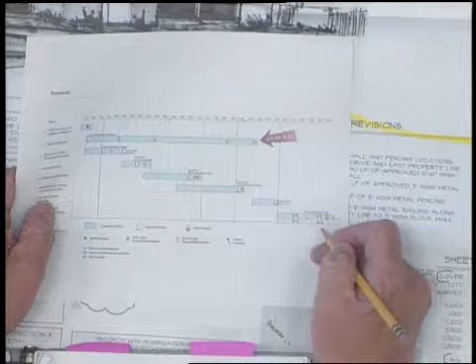What's interesting is that's why I passed out this little schedule given to us at that hearing on Friday, where you can see it says 'you are here.' We're basically near the end of the process. They're going to proceed with drafting an ordinance, and then move on to Planning Commission and City Council for approval. In essence, we've kind of missed the whole window.

Unfortunately, I don't know, maybe some of you got notices, but I never received any notices about meetings or the progress, other than the one I attended back in August. I had hoped we would get a response and our subcommittee could meet again, but unfortunately that didn't occur.

I was told at the meeting on Friday that we may get a courtesy visit by staff before it moves on to Planning Commission, but that essentially may be the end of our ability to have input. So that's kind of where we stand.

Several things happened on Friday that I think are of interest to the work we do on this board. One is that the Planning Commission made a recommendation, or agreed with staff's recommendation, to allow an increase in size for accessory buildings on large parcels of 3 acres or more, to 1,750 square feet. There's also a move to combine what was the size of a garage at 750 square feet on the same parcel with an accessory building at 500 square feet, so now you can have an accessory building at 1,250.

So we're going to be seeing some different nuances if and when this is adopted by council.

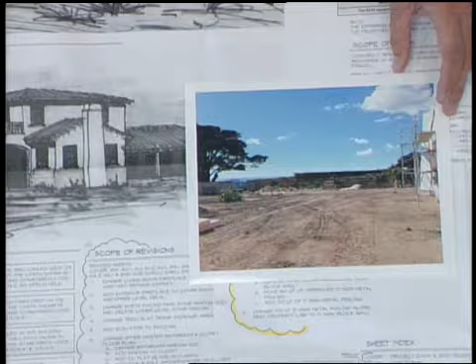Got it. Okay. We have met with the city staff, we've talked to them, we've met with the neighbors. They're all on board, and I'm not aware of any neighbors being here because we've done our homework.

On our other — I made a mistake, this is on the west property line. On the west property line... this is the east property line. On the east property line, we currently have a masonry fence up to a certain point, and then an open metal fence coming across. This fence is 5 feet high. This masonry fence varies between 5 to 5.5, up to 6 at this one point. It's all documented. What we are going to be doing is changing this fence and making it 5 feet all the way across to this point, connecting to the existing 5-foot-high metal fence. So that's what we're doing.

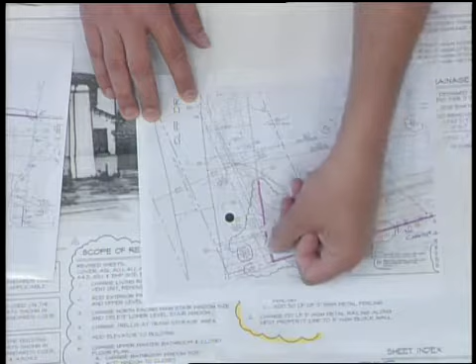Here is a view from the actual street. Let me go back one notch. In this case, there's currently a city easement. The city always wanted to have a gate at both ends. When I had the fence going in at a diagonal, the gate wasn't practical, so I was able to talk them out of it. Now that we're going to go perpendicular to the road, they would like to have a gate here. We will still have a man gate here to the bridge going across this point.

So here is the view of the house that's under construction and where the fence is going to go, the 5-foot-high fence. This is approaching it, so you can see all the miscellaneous utility stuff that's happening in the vegetation.

Now, this is from our neighbor's house, John and Sandy. We met with them to show them so they would understand the impact of what we are doing. We put up the story pole string lines, and they are on board with our proposal. So that is our request today.

Okay, anything else? Nope. Okay.

Before we go to questions and comments from the board, is there anyone in the audience wishing to address this project? Katie, did we get any written material? No, Mr. Chair. Thank you. Chair, seeing no one come forward, I'll close public comment and bring it back to the board for questions.

Who has questions? Yeah, Mr. Chair, I do. Paul, what was the reasoning that it was designed this way in the first place, and what's the motivation to change it? The motivation was that the neighbor wants to be able to use this part of his land for his needs. Okay.

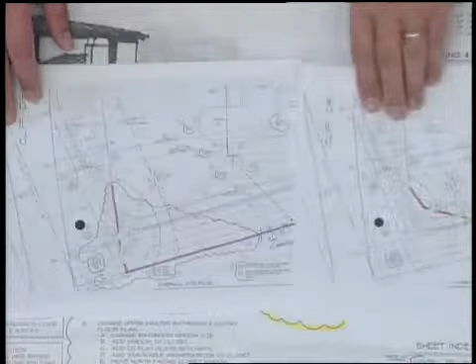And can we show this in relationship to the full site plan? Yeah, so let's put those back. So that one is down here. Correct. And streets down there? This is Cliff Drive, and this is Marina Drive with the cul-de-sac. There's an existing house here, and then this is the other section. Okay, so this is occurring where the cypress tree is. Yeah. Okay, and then the other one is occurring over here. Okay, all right, other questions?

Was there some kind of a neighborhood easement, or how does that tie in? Correct, and staff can help us on that discussion. It had to do with a visual view corridor along this side and along this side.

Landscaping is stepped accordingly along this side, which is why I took the picture from the actual street so you can see how the current situation looks. Then taking this fence that's along this direction, taking it from 5 foot open.

So we're talking about that fence right here, that fence that's currently there. Is that on your client's property? It's currently on our neighbor's property, and what we will be doing is putting a fence that's 50-50.

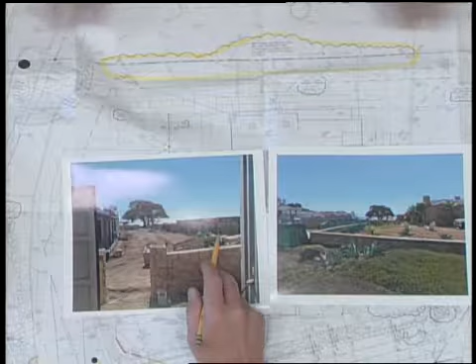So it's basically on the same line? Whose property does it sit on? Currently, that fence sits on this neighbor because he built his house first. If you rebuild it, will it be in the same location? It's going to be on the property line, split 50-50, dead right on the property line. Correct. So my client will lose about 4 inches of land.

Down here, this one's going to be masonry with plaster, and I'm assuming capped and finished similar to the other fences already being constructed on the site. Correct. And this fence down here that's getting redone, is that masonry, or what's going on? No, this is going to be open metal, continuing with the open metal that's here. We have a 5-foot-high metal fence.

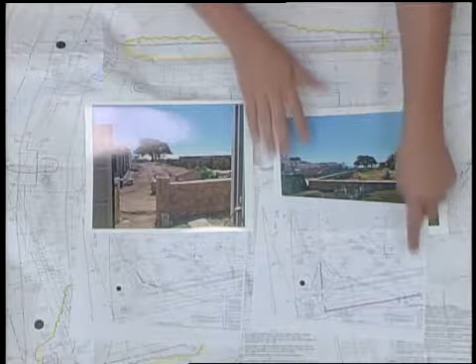Is that showing on these drawings? There was a detail, but I did not print it out. Kind of a chain link fence, isn't it? What does note number 9 state? Number 9 is 5-foot-high max wrought iron fence.

So is that just a fence that looks like a picket fence? Correct. It has to be non-climbable for the pool. So it's like that, and it's black, and that's what we approved as part of the main project, for this section over here. These people over here had a chain link fence, and chain link is a tighter weave.

So all you're requesting is to straighten this metal picketed fence and go this way, and the gate's a metal picket to match, I assume? Correct. And then there's a person gate here, correct, and then it goes up and hits the masonry wall with plaster on both sides.

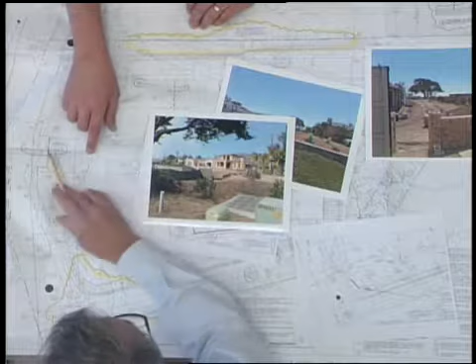When I was out there Friday, a lot of this is being built right now, and what I was confused about is where am I looking at, where is the ditch? Is that this thing? Yes. So this is that concrete swale that goes out, correct? Correct, it stops at this point. It's basically this area.

So the fence is crossing over it at some point, but on the inside at this point. Yes. The bridge you're talking about is right here over that swale? Yeah, it's just so that if they ever walk to Henry's Beach they can come back this direction, and they have another bridge down here just so they can get to the other side. And this wall is already built here. Yes, that one's already built.

Okay, if no other questions, let's go to comments. This is a review after final, so we just have to decide whether or not we accept what is being proposed. Mr. Chair? Yes. Could we ask the planner if there's any comments from the city or any feedback?

Thank you. I'm here just to remind you about the 30-foot view corridor and that there is a condition of approval about it, stating the maximum height of landscaping, et cetera. Staff feels that a wall fits within that, since it's not going perpendicular to the view corridor, it's running down it. So we find it would be acceptable if it's acceptable to the board.

Trees are in a view corridor, right? Could be, not the big ones. The purpose was to maintain the view, to maintain these cypress, as we went through that original review. So this will be a locked gate, I take it, because there's a lot of activity in front of that, right?

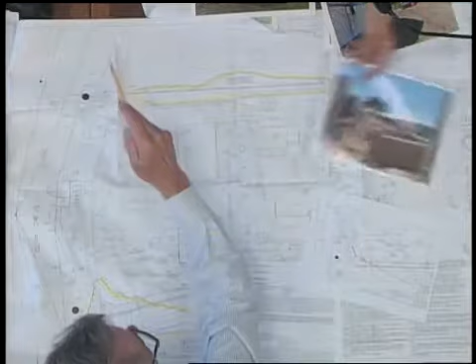If you've been out there, you'll notice that this wall—this is the west side—that wall that goes down in front of that house, they've now planted a hedge right behind that wall. That hedge is now up at 7 feet or something, but it's above the 5-foot mark of this wall.

The interesting thing about this hedge is it starts from this point and continues west. That hedge is not in this area because this was regulated—that's the view corridor. Exactly right.

Hearing no other comments, the chair would entertain a motion. If he's coming back, we can't... No, it's a review after final, so we just have to decide whether or not we accept what he's proposing as a change. We can approve it or not approve it.

I'll make a motion. I move to give this project final approval. I think he's followed the Good Neighbor guidelines, the quality of material is appropriate, and the architecture is consistent in appearance with the style of the architecture in the neighborhood.

Would the maker of the motion want to recognize that we're aware of the view corridor and that the westerly wall doesn't violate that? Yes, and the board is aware of the view corridor that is already stipulated on the plans, and that the current change of design does not interfere with that view corridor.

That's the motion on the floor. Is there a second to that motion? Second. Any further discussion? Hearing none, the chair will call for a vote. All in favor signify by saying aye. Aye. Opposed? So carried.

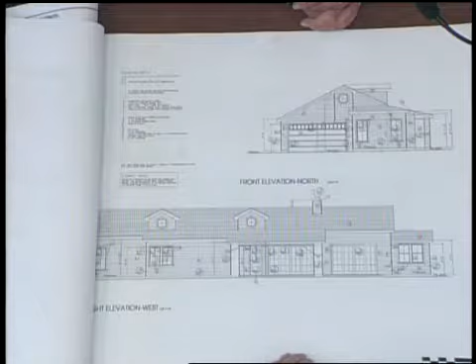And the elevations. So we're on the next page, right here and here. Didn't change the elevations, it just opened. No, it didn't change the elevations at all. Just made it functional.

So we're going to go through very quickly and see if we're satisfied that this looks like a final set of drawings. Okay, so we've got site plans, building code, electrical sections, elevations, structural details, lighting, planting plan for the area they have to plant, landscape detail, et cetera, okay?

Is there anyone in the audience wishing to address this project? Katie, did we get any written comment? No, Mr. Chair. Seeing no one come forward, the chair will close public comment and bring it back to the board for questions and comments.

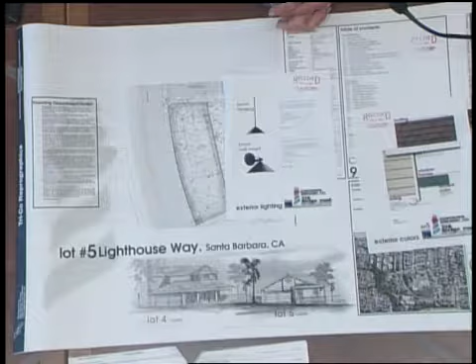All right, if there are no further comments, then the chair would entertain a motion. This is for final approval, and this will have a 10-day appeal period if we do in fact give it final approval. So, do we have a motion?

I'll make a motion. Joe, I move that we approve the project, give it a final, based on its review of what we've asked you to do, and it's consistent with the appearance and compatibility with the neighborhood, and quality of materials, and you have a full set of plans.

Thank you. Do I have a second to that motion? I'll second. Okay, we have a first and second. Any further comments? Any discussion? Hearing none, the chair will call for a vote. All in favor signify by saying aye. Aye. Opposed? Abstentions? So carried. This has a 10-day appeal period for that approval. Very good.

Thanks. Yeah, thank you.

Let's go to... we need to wait a few minutes. So our next item is going to be item number 3, 45 Las Alturas. We need to recess for about 5 minutes.

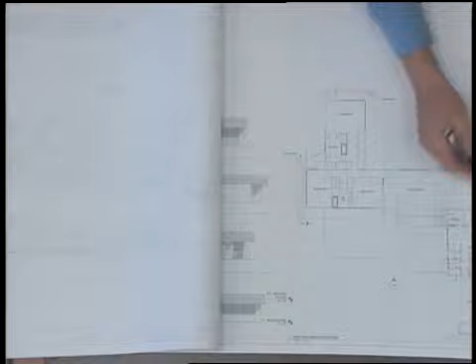This double hatch is the second floor addition. We got 2 roof decks. This is our removal of that eave, and so that happens there, and there. So you can see it here, it's in 4 locations.

So we added glass to the upper eaves there. You can see that existing house has some of that. That's the existing bedroom on the north side. The addition, we've incorporated some of that element on both sides of the addition. This is, I can show you in plan where we are right here.

This is the view off this new little deck. The 2 decks are roughly 100 square feet in size. These are just sitting decks, not huge decks to be inhabited, but they're both small decks. And that's this one there. So the glass runs up in that gable up there.

This is the garage. No, I was looking at the glass. Got it. Where that decks, those 2 decks are right there, back. Yeah, they're apart, they're apart.

We also looked at the stair. In the previous rendition, the stair was in line with our second story addition. We broke that out, and that gave some relief to the street side facade. So this is the street facade, the stair is articulated on the facade, and it gives the roof a nice break there.

We also reduced the size of this chimney. In addition, we've added a gate and a man gate, and this is the existing 5-foot stucco wall. It's a 5-foot wood gate and another piece of stucco wall, and that sort of ties everything together.

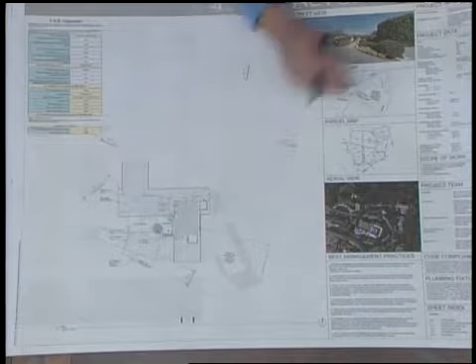And we've got, and Chris can talk about this, but we've got a series of screenings going on. There are 2 existing trees in this front courtyard, and then Chris is going to talk about the additional screening we're doing at the front. So there's a filter to that. I'm going to show you an elevation.

Let's see, so Joe, that's that window there. This window's in the shower, it's going to be a frosted window, it's not a privacy concern.

The other, just to show you the deck, there are 2 little master decks. And the one that is nearest to 44 Las Alturas, the section, and the owners put up story poles so we could see this too, and we have the photos, but the section shows that the house itself, the garage, is screening that deck. So the whole addition is wedding caked in the middle. The outdoor spaces on the second floor are tucked in with that second-story addition.

Our plate, the kitchen has a 9-foot ceiling, and the master has an 8-foot plate. We stayed with the 8-foot plate at the second floor. We pulled back before we had shorter eaves, so we pulled those out. These are bifold windows, so if you're out on this deck, that's a 6'8" rafter tail right there. Dropping it down would have been a conflict with the window.

The other thing we looked at is the amount of glazing. We did a reduction there and a simplification just to get everything working together. We had windows on the master running to the corner; we reduced that size and brought the windows up to the eave level. Same with down here. And then, like I said, we brought these windows all the way up to the top of the gable.

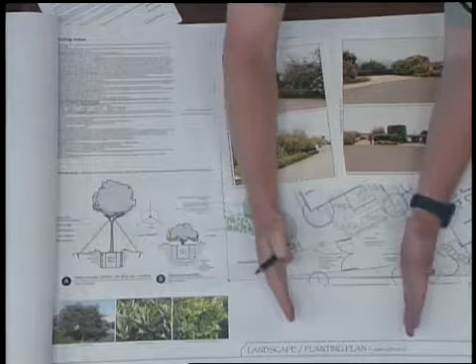Yes, okay. So the project we're talking about is to this side, correct? Yeah, that's right. So those ficus run down this line and stop somewhere in this area. From here to there, these are probably 14 feet tall, I think. We also have some existing hedge screening here that we're going to keep to remain, and that's very minimal on the landscape, aside from existing.

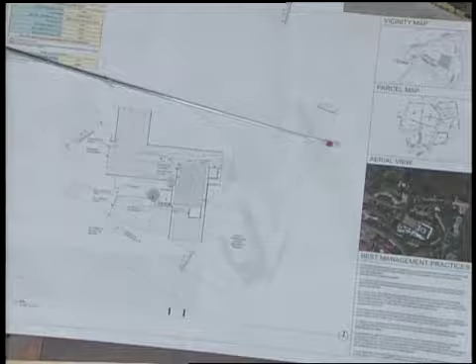This whole thing could have been solved if we had had an opportunity to consult and suggest that they take this pop-up and, instead of having it face the street with its broad facing which upset everybody aesthetically, turn it around 90 degrees and put it over here. They'd still have mountain views, they'd still have water views, they'd still be right over their pool, it would be very attractive, and it would solve my privacy issues. But we never got a chance to discuss these alternatives with them. That's the only thing - why not have a friendly neighborhood conversation?

I know Rick - is it Chris? Sorry, Chris had mentioned some time ago that they had thought about other versions but didn't like them, and there was this problem or that problem. But this solves it, from my point of view, and I just think we should have had a chance to talk about it. Because the way it is now, it doesn't solve it for us.

Next speaker is Thomas Monroe.

I live at 20 Las Alturas Circle, and I can certainly understand these people's desire to have a dream home in Santa Barbara. I just moved there in January into what was a new home, bought as a spec home, so we weren't involved in the design. Its second story was disallowed from facing the street - it goes down the hill like most other houses on that street, so from the street it appears to be a single-story home. My observation is there's plenty of slope there to build down. I don't know if that was considered, but nobody was talked to in advance. We got your note stuck in our door, but it's way after the fact and your plans are already submitted, so I think that was a little...

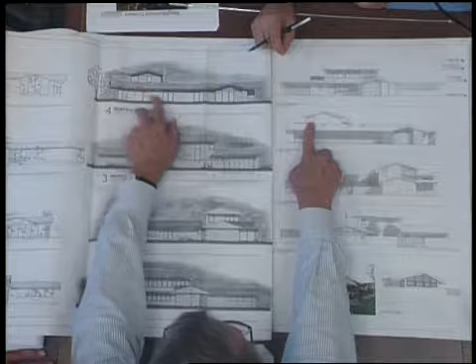And this is west, the piece that he was showing. It was a hip, and now - no, it was a gable. Soffit extrusion, yeah, that soffit thing, yeah, that's what he was showing at the beginning. It was kind of a Frankenstein.

Here it is, I'm sorry, right here. Oh, so okay, as he mentioned, he said to go to a Cliff May design, he went to this. Okay, so that was Cliff May. And then...

Okay, now what's going on here? It's a wall and gate now. Yeah, so in this version, we didn't show it. In this version, we're showing the existing stucco wall, and then this is the new gate. So the new gate - is this piece of wall there now too? No, this piece of wall is not there. All right, so everything from here over is new.

That's right, the property line is angled. And what's the garage door material going to be made of? Right now these are glass garage doors, but they're hidden with the new wall. That's correct. But so a piece of the glass appears in front of the new wall. That's right. And we'll go back to that in a second.

So that new wall, let's just go back very quickly to the site plan. The old one? No, this is the old one. Whoops, we can still use that to look at. Let's get rid of it real quick. So that wall and gate is out here. That's right, that's what we're looking at. That's this one.

All right, and then what did we look at? South, south is - where are we at? South is here, so this is that wall coming across. So those windows are there, that's now a set of doors. Yeah, that's existing, that's the wall entry. Okay, there's the fireplace - show that. That's right, that's the fireplace there.

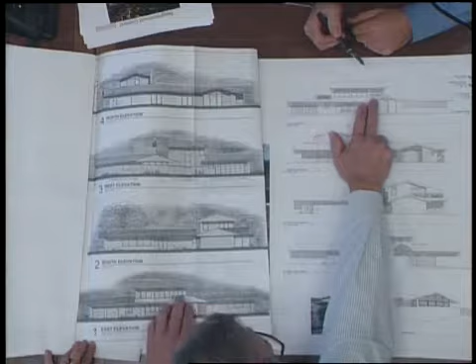Well, the eaves are lowered, so they're basically at about 6'8", which is typically what you do on a second floor. Did the height of the addition come down? The height, as far as, we had added a little bit just for framing on this version, and we dialed it in here, so the height did come down.

How far? 19 inches. So the whole height of the roof has come down 19 inches. If you left the walls, the plate heights are at 8 feet up there, so it wouldn't change the height of the roof, would it? That's right. We just had too much framing on the roof before, so that's what brought it down.

19 inches of framing? Yeah, that's a foot and a half. It was conceptual. I mean, we got to dial it in. Okay, here we are. And then this piece there.

So, to the front floor, yeah, that helps a lot. So the whole addition has come down 19 inches.

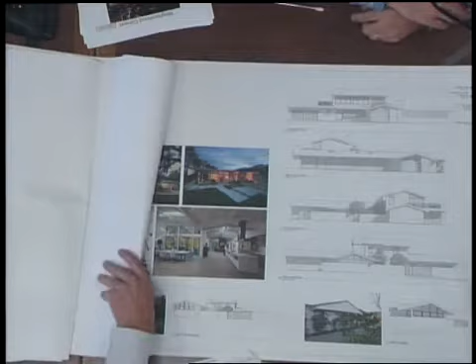But did you also change the slope of the roof? I think it just got clarified what it is. The existing roof is 3.5 and 12.

Can you tell me how tall the house is now? If I'm using this as the finished floor line, which looks like at the bottom of that, it appears to be about 22 feet to the ridge.

Under the city's single-story residence definition, remember we don't look at single-story homes typically unless they're in a special district. Those are defined as anything under 17 feet 6 inches. So that line represents a single-story house allowed in fact in all places within the city, whether they're in special districts or not. So this is more or less 4.5 feet higher than that.

Single-story criteria. Why was the ficus tree, what was that reason for the hedge, the 14-foot hedge? It exists, but why does it exist? Can you answer that? Can we go back to the photograph?

So, this is a hedge, and I assume that's a tree. Is that right? If I recall, that's a ficus tree. This is a hedge, and under the new hedge ordinance, this is just one tree. Yeah, it's a tree. You can see actually in this picture there's a series of them. They run down the property line, and they're 14 feet tall.

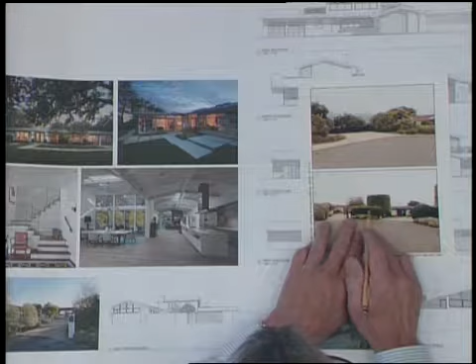Here's a good picture of that - I'm estimating based on the photos, but it seemed about right. So there it is, that's basically the same thing. This hedge here is 8 feet high, maybe less than 8 feet. But under the new hedge ordinance, you're allowed to have an 8-foot hedge on the front property line.

I'm not questioning the height of it, I'm questioning the reason for it. Oh, well, those are on the neighboring properties. Can I ask the neighbor for that? They're not on review. Not appropriate for review. Ask the neighbor why the hedge is so high. There are other hedges over on this side on other properties that are just as high.

I think if we're questioning privacy and we have a 14-foot hedge, I have a right, Brian, I have a right to ask why. So let's go back to the plan for a second. I'm just questioning why, if we're questioning privacy here, and all of a sudden we're on the neighbor's property.

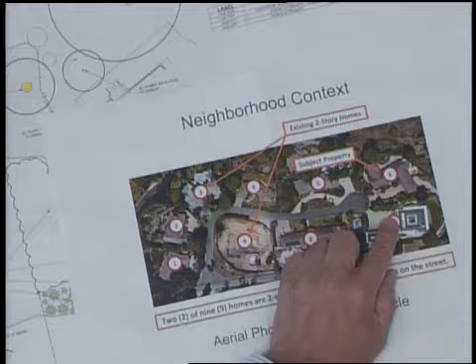And there appears to be a hedge here also, correct? Yes. And that's on the other property? I believe it's on both - it straddles the property line. Okay, so it's on the neighbor's property too. I think it's Ligustrum.

Other questions? Yes, I'd just like to get the aerial - go back to that area. Sorry, not the aerial, the street view. This one that shows the house and the story. Just talk into your microphone, you don't have to talk into the box, but make sure it's on.

Anyway, I just wanted to - would you show exactly where all the new olive trees are going to be screening, for the purpose of the public?

Looks to me like it's right in front of that bedroom. It appears just to be lined up with this eave, so what would the exact placement be and what exactly are you intending?

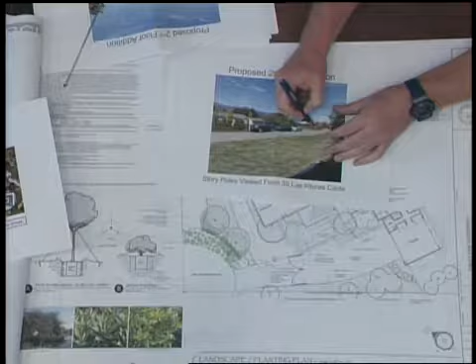Something to that effect - there's 2. The second one being over this direction, about like that. It would screen some of that new window you put in, that gable - actually looking at this, that gable right there you could consider filling in with glass. How about a third one?

Are there olive trees around, or are those just 2 new olive trees? 2 new olive trees, there's no other olive trees that I remember. And the olive trees, these particular species grow how high, more or less? 25 feet.

Other questions? I just have a couple on your elevation, on the chimney. Where am I? Right here. Are you going to have any kind of chimney cap, or is this going to be a gas fire?

Yeah, and we are going with a standing seam roof here, so I was going to mimic that with maybe a 4-inch flush chimney cap of the same color. Okay, so that's what these two lines represent? Correct.

And then over on this side, these rafter tails are going to be exposed. So, and I know you're still at design development...

So are you going to have any gutters here, or is the water just going to come off that? Yes, we are having gutters. I think we did not show the downspouts, so somewhere there'll be downspouts, etc. That's correct.

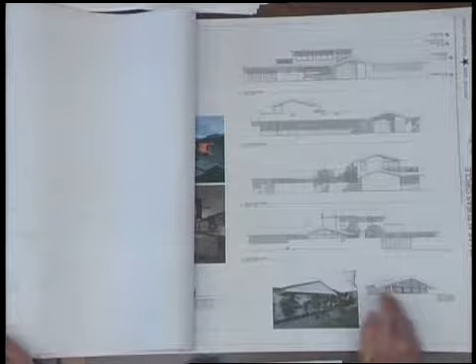Any other questions? Yes, for the architect - I heard you answer the question about turning the house in a different direction, but what about, did you explore the idea of putting the house lower? And what was the reason that you aren't doing that?

Yeah, there are a couple reasons, thanks for asking. The leading reason is this is the existing building footprint, so we are not increasing any impermeable area with this remodel addition. Another reason is that this is actually built up right here.

So this is really poor soil on this side, and there's a lack of flat areas. We looked at maybe coming out here, but there's a big mature avocado here, and also it would be a hall along an existing bedroom to get to a second bedroom. It just doesn't work functionally without really ripping that area up. And obviously the views from up here are different than over here, so there's a way to explore that with this addition.

We did spend about half of one of our previous meetings discussing all the different locations. Well, I still want to bring it up so we can have it out there anyway. We did go over that in depth, I think, at the last meeting. I just want to go over the issues of window placements, so I'm going to mark on your drawing here.

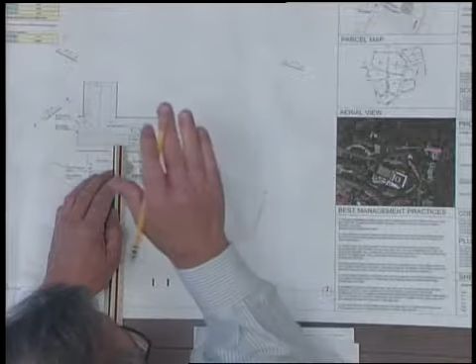This is the windows here. There is a window here, and there is a window right there, right? And the staircase is in here. That's right. Okay, and I just illustrated a moment ago on your section that somebody standing here can look out that window, but there's no way to look out this window because the staircase is too low at that point. You'd have to get on a ladder to look out that window, correct? And that window, I'm assuming this is relatively accurate.

This is the face of the other house, or is that the face? This is the roof line, and that's the face. Okay, so the face of the other house, and we don't know exactly where those windows are, but if there's any windows on that surface, from that window that you can't see out of, that's almost, if this scales correctly, 70 feet to here, and there's a hedge in here somewhere. And the trees, kind of those big 14-foot trees, kind of stop right here, and then there's hedges. There's a couple other trees, at least from the aerial photograph in here. And then from these windows here, if I look directly straight out, it's looking past the corner of the house.

If I'm looking from that far corner window to this house, from this point it's 80 feet. This is scaled correctly, at 1/16 scale. So that's 80 feet from here to there. That's 75 feet from here to there. And let's see, there's a window that looks that way, but you can't really look out of it because the staircase is, oh no, excuse me, that's where you do look out.

Can't see that. Okay, and the two trees that we're talking about being planted are roughly right there based on your plan. Okay. And then, was there another window over here? There's a shower window, but it's frosted. Here. Yeah. Okay, so there's a shower window here. Okay. All the other windows are facing towards Montecito and Carpinteria, correct? That's correct. Okay, other questions?

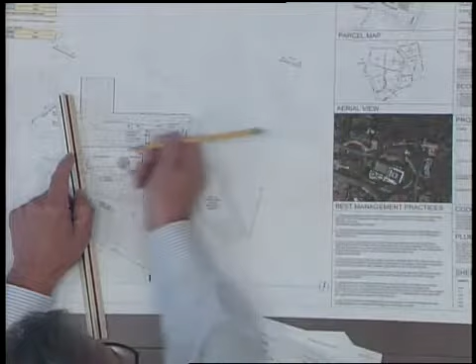Okay, if there are no further questions, then let's go to comments. The applicant is requesting project design approval.

I have some comments, Mr. Chair. I kind of understand where Mr. Matisha was going with the reason the hedges are so tall. But I think I'm the one that brought up the Cliff May style. And I grew up looking at sunset books of Cliff May. Cliff May had a philosophy: his philosophy is we were coming from an era of very formal architecture, and his purpose was to bring architecture to the people and to be a very calming, casual lifestyle. It was very popular in the 50s.

A lot of his homes were about introducing outdoor living into the inside. You know, a lot of homes had barbecues that were on the outside, brought to the inside. It was about very casual California living, kind of personifying the California lifestyle. And I felt that the original drawings you had brought us didn't quite capture it. I look at this, and I look at what was there, and I actually think you did capture it. I think you were very successful in creating the philosophy that Cliff May was trying to espouse, of bringing the outside in, very casual, relaxed kind of lifestyle.

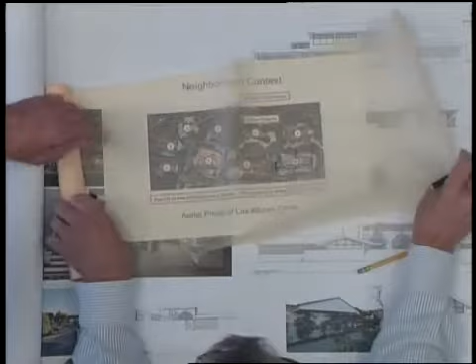And so when I look at the neighborhood and how it stands now, I think what they've done, what they've designed, and in keeping with the style of the architecture, I also believe you've achieved a look of not having it be a remodel. It actually looks like a whole structure.

And the other thing I want to underline and really acknowledge is your balconies, your upstairs balconies. They don't look like party balconies. They actually complement the space that they're attached to, the bedroom. So it's actually improving the interior space of the bedroom, and they're not meant to be some kind of party balcony, for kids or whatever.

So I think I can totally support this project. I think it's well within the guidelines of this neighborhood. Okay, other comments? Yes, please.

Yes, I agree with my compatriot here to my right. I think that this is really not a huge addition. It's very modest, and I think you did a very good job of it this time around.

I think that the addition of a third olive tree might really be a good idea in the area that you saw. Sure. So right now where they're positioned, they're going to hide half of that addition from the cul-de-sac. The third one will probably take care of the whole thing, so that you won't really see it from the cul-de-sac.

I think our fearless leader, Fred, has pointed out that any windows that are looking into any neighbor are a good 70 feet away. I mean, also screened by ficus trees and everything. So they're well within our guidelines as far as privacy goes.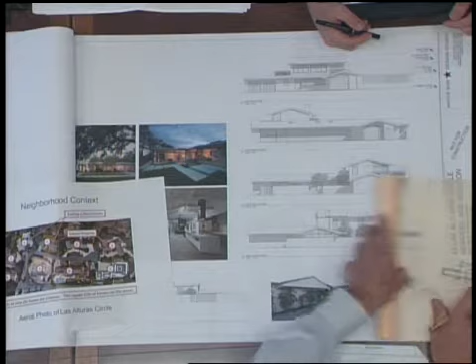And if you try to translate what's shown on the landscape plan, I believe you're going to see a tree right here, right on the line, right here and there, and probably another one up there. If we put three in there, I think what you see here—and Denise is suggesting another—put one more tree there. Yeah.

That's a scale, that's 16 feet. I just drew... here is 25. Here is a human person for scale. Okay.

And if these do indeed grow to be 25 feet, you said? You see how big those get? More, eventually, yeah, those are gonna be 25 feet. I think it matches.

I mean, there's some, and over here you have a hedge. There you have a ficus, that's 14. Whoops, I didn't draw it at right scale. Hold on, 14 feet. There's 14 feet here. Okay, so there's 14 feet here.

I like the direction it's going. I think the idea of adding another olive tree would soften the look of that second story, the addition, that most everybody doesn't like. And I don't think that there is any privacy problems here.

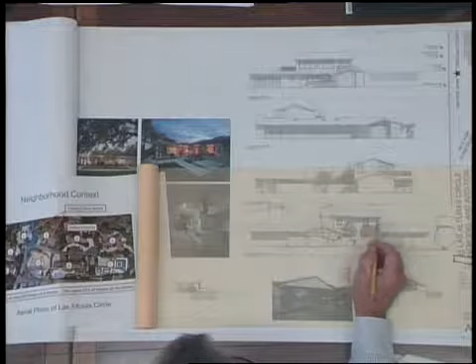When you do come back for your next review, I'm going to be very interested in the material of this window. I think that the plan clearly indicates that the privacy views have been addressed. The City Council has instructed us that we are not required to guarantee a view out of anyone's window, either from the applicant or from adjoining properties.

We do, under our guidelines, try to really look at the issues of privacy, particularly as Ms. Woolery pointed out, when we have properties with a property line and we've got 10 or 6 feet between setbacks, and we've got a home like this, with a second floor up here, and windows. We run into that quite often. That's of considerable concern, but when we have windows that are 70 and 80 feet apart, in my view, that's of way less concern.

And particularly how these houses are oriented to each other. They're not like we find in many houses in other parts of town, where the houses kind of line up in a row. So I think that's pretty clear.

The only thing that concerns me is the fence and the gate issue. Just because of the nature of that street, most of the homes don't have fences and gates out front. So that's kind of a character issue in my view of the street. I would like to see a study without the gate and the wall there, maybe some landscaping. But certainly if that goes away, then I'd really be concerned about having glass garage doors, because at night those are just lanterns straight down the street.

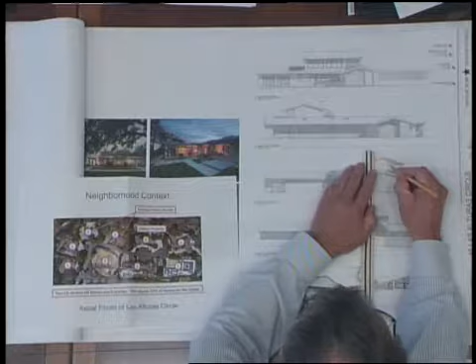So if you scale a 6-foot person, that's a 6-foot person, if I'm doing this correctly, inside here. So see how that deck is tucked into the roof. So the roof is hiding a portion of that deck, and then this deck is way down.

That's another relationship. I know that it's far away from the neighbor, but they're here. Okay, the neighbor is over here. They're 70 and 80 feet away from them. I'd just like it to be clear so they understand it too. There's 60, 70, where am I at?

Section showing, if you want to see it. 80 feet. There's the neighbor over here. I don't know where the elevations are here. About the same. Charles, do you want to see a section of this right here? They do have a section.

That's this. Okay, it's down. The roof is actually providing a lot of privacy for that. So line of sight is here, at that corner. So if they're looking over that corner, looking over the roof, they can't see that house. There's no way to see that. This edge of the roof blocks it.

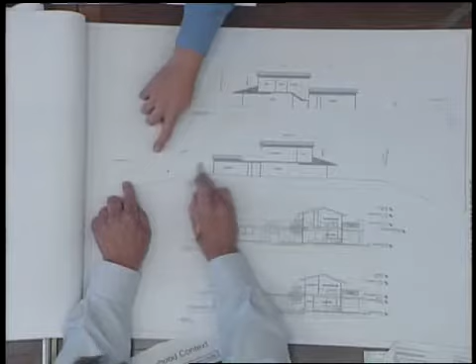And what about them looking up? What are they going to see? They see above that line, so all they're going to see is that roof. See, there's the line. Is this a rail material? Or is that a roof? Oh, that's the roof over the garage. That's the roof. See, the roof is doing this, okay?

And the deck is carved into there, okay? So somebody standing here can't see down over this edge of this deck, over this edge of this roof, down into this house, which is actually down.

It's almost, well, it's actually more than 6 feet. It's more than 6 feet, is it not? If I scale this right, 3/4 inch, it's like 8 feet. Okay, yeah, I kind of understand it all. Thank you, okay.

Any other comments? Hearing no further comments, the chair would request a motion. The applicant is requesting project design approval. We could give it project design approval with comments, or we could not give it project design approval and give direction for the applicant to return with comments. Those are probably the two general approaches. So the chair would look for a motion.

I move to give this project design approval with the following conditions, to return to the full board with the following conditions to be met: please look at an alternative to the gate at the driveway and the wall and the glass garage door, and to put another olive tree in the front at an area to be determined by the landscape architect.

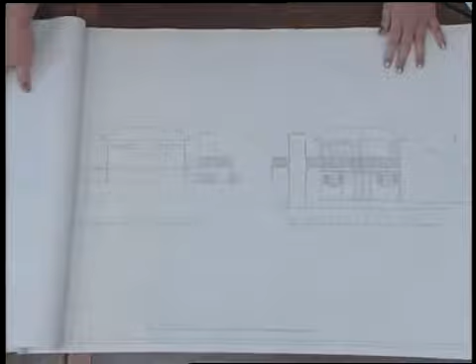Okay, so here we're looking at the west elevation and east elevation. I don't believe solar access is a problem on either side of the property.

Here is the existing site plan showing the layout of the home, and here's our proposed site plan.

So here's where we're going up for the second floor addition, with a deck continuing out over the rest of the house. And here we'll be taking out a linen closet on the first floor.

And having our interior access up to the second floor, so that's the only change on the first floor. Here's our proposed second floor, a nice large master suite. Here's where the stairs come up from outside, with the deck continuing out here.

We have a gas fireplace downstairs. We'd like to add another gas fireplace upstairs for outdoor use.

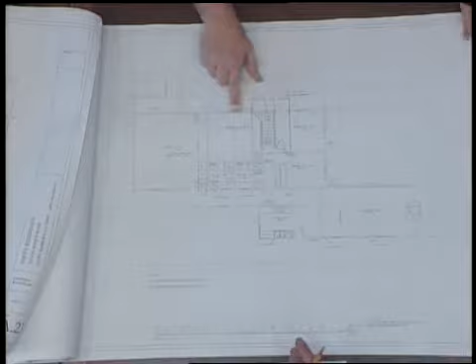And again, here's the existing floor plan, and our proposed roof plan here, showing the second floor addition and the deck. Okay, and again, the existing first floor, showing the staircase coming up for access.

Okay, and so at the bottom here, you see the existing south elevation and then our proposed new elevation. So here we have the addition and the new deck. We'd be taking out this part of the roof.

And here's our existing north elevation and our proposed new. And our east and west existing and proposed new elevations here. I believe that's it.

Yeah, okay, thank you. Anything else? Before we go to questions and comments from the board, is there anyone in the audience wishing to address this project?

Katie, did we get any written correspondence? No, Mr. Chair. The chair is going to then close public comment and bring it back to the board for questions. Who has questions? I do, Mr. Chair.

Are the shutters smaller like that, or is that just a design drafting thing? They are pretty small. I believe they're drawn just how they are on the bottom floor already, so we were matching on the top.

All the hips, and you're changing - it's not a hip roof now. I mean, what you're proposing is not a hip roof. Well, it is and it isn't. Right here, if you look at the other elevation, yeah, it's hip here. Okay.

Sorry, that just doesn't compute. Let's see, it's not the same. Yeah, let's just check something. That's about 12 feet - oh wait, excuse me, that's 8. It's a quarter inch, so that's about 6 feet. So go to the roof plan.

The roof plan is drawn at 1 inch equals 10. Hold on, and that shows it to be 15 feet. So the drawings don't - they don't match. Okay, and I have another question.

Who prepared the drawings? I mean, it's not required, but I'm curious. An architect friend of ours. Can you put his name? He can't take on the job, so unfortunately we're going to take it over from here. Okay, that's all right, that's fine.

Okay, other questions? One of the questions that we're going to have, which I don't see here, is I'm assuming the finished floor line is close to the bottom of that door threshold. Right, so that's the finished floor line.

So it appears that the finished floor line of the second floor is 9 feet up, if that line is in fact that line at the threshold of those doors. So that's 9 feet, and it appears the plate height might be at 8 feet, but it probably isn't, given the fact that to get a rafter to come down and do what you've drawn here, that actually looks to be like 9 feet. So that could be 9 feet, but we don't know for sure because the drawings don't quite jive.

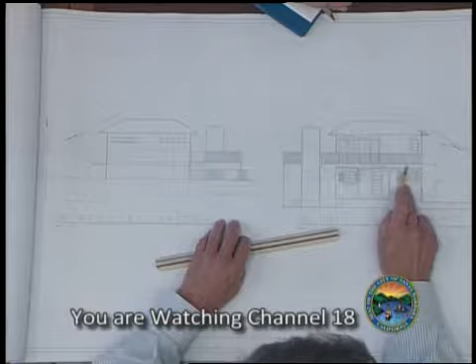These appear to be vertical railings outside, stuck onto the surface of the header of that floor, because that's the 1 foot, more or less 12 inches, of structural support to hold this floor up.

Those doors don't appear to be standard 6'8" doors. They look more like 6'10", but it says 6'8", though they're not drawn that way. Verticals look like they're sitting at the ends of the rafters. Yeah, they're at the end of the rafters. Mr. Chair, what's on sheet A42?

A42 - just a question what this thing is. That's the existing flue that we would enclose and go up a little bit higher. There's a flue, separate - what is that flue? Is that a heater flue? It's for the fireplace, as far as I know.

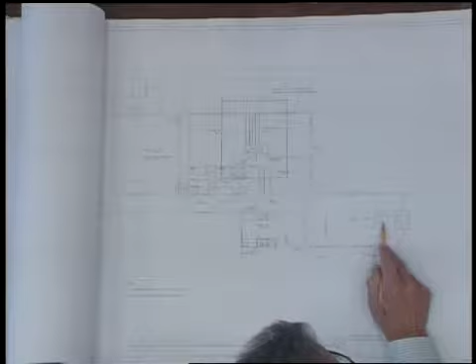Let's go back and look at this floor plan. Existing fireplace - that's the one we're talking about, the only one. But there are two fireplaces there, that might be a mistake. So there's a flue here for some reason, I don't know why. Okay, other questions?

What kind of party are you going to have on the deck? No big parties planned, just some nice outdoor space, 1,100 square feet down by the creek. There's lots of beautiful trees and mountain view, so we'd really like to enjoy it. Oh, great. So we really enjoyed the back patio and would like to have the upstairs deck as well.

Let's go to comments. Mr. Chair, I have a question - I just wanted to make sure that one of the plan check corrections was to ensure there was adequate interior access. I just want to make sure that was clear on the plans. Interior access, in what way? From the top floor to the bottom floor, because in the previous set of plans it sort of alluded to that. Let's double check that.

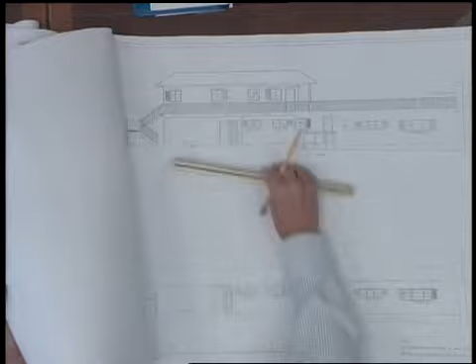Roughly 7 feet or so, so that means the steps are here - a set of treads and risers, then it turns and comes down to another set. So it's just not drawn correctly. Here there's a walkway and a garden area, and that's not on the drawing, so that's why it's confusing. Does that answer your question?

No, I'm just looking at the plan check corrections, and it says... sorry, I'll find it and come back.

So just to be clear, this is the proposed second floor plan. This is why it's confusing - they're mixing the first floor and second floor drawings together. So the deck is virtually, as I'm reading this drawing, this whole entire area. Yes. So the whole first floor roof has become a deck.

Okay, so I found the plan check comments. It says the proposed floor plan configuration did not meet zoning as it is two separate units without proper interior access. So revise the existing floor plan to show proper interior access between the existing and proposed second floor addition. Additionally, with the proposed new exterior staircase providing separate exterior access and the large office/desk area, which could easily be illegally converted into a kitchen, there exists a potential for an illegal residential unit, which is not allowed per zoning.

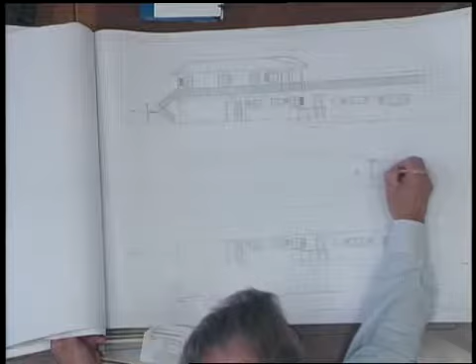On the other side, the other issue is here, one of the things the board really looks at is the relationship of the first floor to the second floor. Typically we see about an 8-foot plate height. What's happening there is when you build that second floor, this is a 6-foot person, and that's an 8-foot high wall. The studs come up like that. There's a double header on that plate, and that is where your rafters are set. That mark is generally 8 feet, although this board on occasion has asked folks to lower that down to 7 feet or 7 foot 6 inches, because that takes the bulk of the house and lowers it down.

So that needs to be drawn. You need to have sections. When you talk to whomever you're going to hire to help you draw this, you've got to have building sections through this so that we can understand how that second floor is going to get added.

And then the other part of that is if you have things that engage the site plan out here, it needs to reflect what's happening on the ground, because one of the things this board will be looking at is whether or not they're going to require you to have some landscaping done on this project. So one of the things you're going to need to share with us is what part of the landscaping you're willing to hold on to or want to hold on to, and what part needs to be changed because you're affecting how the building hits the ground. Because this is mostly a second floor addition, you may not have much landscaping, but you certainly would have some changes if anything hits the ground where it affects the landscaping there.

So that's really important. The other thing that's important on this piece of property is to make sure you photograph what the fences are. Because this is an interior property off of a private easement, the board's going to want to see how this project relates to the other homes. There's a home — you were out there this morning, I was out there on Friday — there's another home right here.

The other thing that helps on your floor plan, if you show the relationship of the furnishings, which wall the bed is going to go on, et cetera, on the second floor, whatever you're adding new, that typically helps us understand what you're after. Sometimes when we find a house that might look too big, the relationship of the room spaces, sometimes you can still get the room you want, but it probably needs to be a little smaller. So one of the things that happens is, I'm looking at the right scale now.

Right now, that's a little tiny bed. Sometimes folks buy queen size or king size, and those are 7 feet by 7 feet, so you want to show what you're really doing here. You also want to show how that closet works, et cetera. That starts to help us understand whether the house is too big just because it's too big, or big because you're trying to do several things in there. So I think that would be fairly important.

Other comments? Yes. The way it's drawn here, you probably couldn't walk under this. Yeah, it wouldn't work, that's why you need to draw sections through there.

Okay, so existing right now, you come out onto the patio and then there's a step down, your patio stops right there. Oh no, I meant downstairs, sorry. Yeah.

Or your deck stops right there, which means the deck is at roof height. All of a sudden your roof is sloping all the way down. If you were walking on a patio underneath, you couldn't get under that without ducking down. That's why you need to have sections.

Better drawings, all right. So, other comments? Yes, I would. I used to live in San Roque, and it's a charming neighborhood with a lot of nice little homes. This is an opportunity to get someone who's going to design a home with some character for you. Right now these drawings don't really show that, and like they said, it's very difficult to follow what's going to be happening here.

I also think it's going to be important to look at our neighborhood guidelines. Any deck up above needs to be 15 feet away from the property line. You want to make sure that's taken care of before you come see us again. Maybe also show us some photos of other two-story homes in the immediate neighborhood so we can see that there's context for this in this particular part of San Roque.

Pretty sure there is, but come back to us after you find a good architect who can draw some good plans. Because one of our criteria is deciding whether what you're proposing is compatible with the neighborhood in general and the immediate neighborhood. Since you're back off that private driveway, understanding what those other homes look like is really important, so photographs of those would be most important.

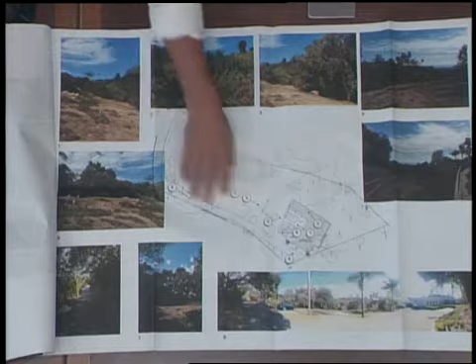Image number 1, looking north on the site, you can see the dense existing oak trees and pittosporum hedges. Alston Road is kind of hidden in here, with a couple homes above Alston. Image number 2 is midway up through the site, giving a closer view of how dense that existing canopy is.

Image number 3 is important because it demonstrates this tall grove of existing eucalyptus that conceals our proposed development from the neighbors on this ridgeline on Alston here.

Image number 4 is looking back, giving a sense of the view here, with a ridgeline coming down. So we really have a framed view, exhibited here in image 5, taken midway up through the site, looking south over hole 16 and the country club with the tower.

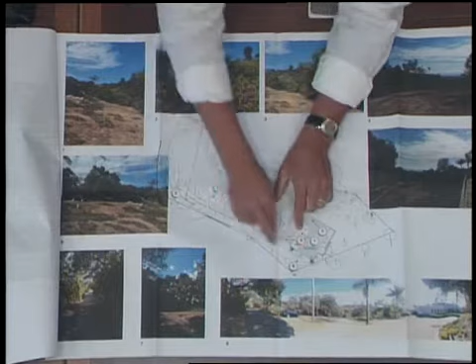Here's a panoramic from this location, which is a shared driveway. Alston Road is here, with the shared driveway coming down, giving more than a 180 degree view looking up the driveway. These 3 palm trees are a good landmark in these photos.

Here's 930 Alston Road, where you can see the garage, a little mansard style. I believe this owner is here today.

Image 7, looking up at the hill here. Image 8, looking down the driveway, a nice mature canopy of oaks - we'll have to limb it up a bit for fire department access, I assume. Image number 9, looking back at the driveway.

So for our site plan, I wanted to present - this is a real, I'm a graphic thinker, and some of you architects and landscape architects are graphic thinkers too - this is a drawing I did early on in the project. Back in 2012, when you reviewed this site, the board described it as unique, I believe. I think this will hopefully help everyone understand how difficult and challenging this property is.

Here's Alston Road and the shared driveway coming down. The red is our setback from the property line - typical front, interior, rear yard. These orange areas are the geological splays some of you are familiar with - we're not allowed to build any habitable structures in these areas. This red dashed line is a city sewer easement that cuts through the property.

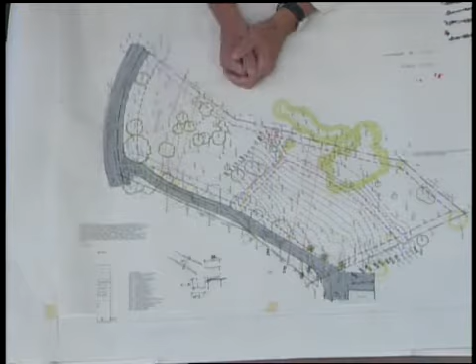The light green is the eucalyptus, pepper tree - anything that's not an oak. This darker green demonstrates how many oak specimens there are on this property. So you can see there's really only 2 areas to focus a development project in.

The previous applicant and owner was in this area, and in the planning resolution passed at that time, they talked about limiting the amount of oak tree removal - they had a driveway that started here and went 200 feet of paving, grading, and retaining wall. So we're eliminating that driveway. When we looked at this site with fresh eyes, hearing all those board comments, we decided this wasn't the best location for a proposed development, and pushed our proposed development forward, taking advantage of the view to the south and the ocean.

I think this demonstrates how constricted we are with this city sewer, the geological setback, and our property setback. So I just wanted to present this color version of the site plan.

So just talking specifics about our proposal: shared driveway coming down, we have a single-story 2-car garage, an entry court. As you probably saw from the rendering on the cover page, we're taking some of the vocabulary of the Spanish colonial architecture and trying to articulate this building.

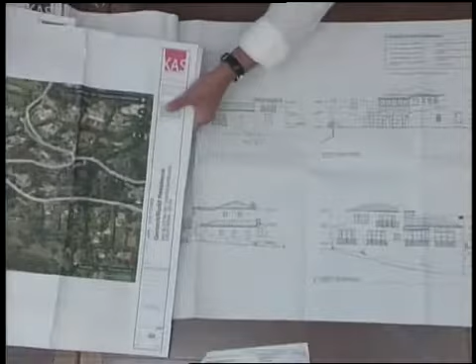So this west elevation is the one that impacts the most immediate neighbor, which is 930 Alston Road. Here's our single-story 2-car garage, that entry court with a low 40-inch wall just defining it, and here's that step back for the second floor. As I said, the north elevation takes some of that vocabulary we're all familiar with from the local vernacular. I think it's demonstrated a little better on the rendering - using these elements to really break down the massing and scale of this, but at the same time fit my client's programmatic needs on this site and work with all of the setback constraints.

So this is the south elevation. There's going to be a lot of solar exposure there, and I think that this north courtyard will be used quite a bit for protection from that sun.

These are the views, all facing towards the ocean, and south towards the golf course. Are these all decks or? Yeah, those are balconies - this is a balcony, and this is the deck with the stairs going down.

Instead of having a wall all the way across, to take advantage of these views, I'm proposing a plaster wall interrupted with some iron pickets and a guardrail, so that we can see through where we have those views.

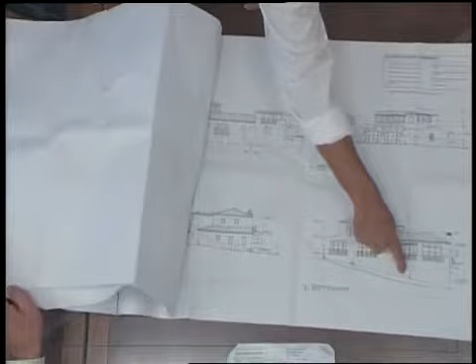Otherwise, it's a solid element, just kind of give it, instead of just one material all the way across. These are really terraces that go down to the ground, so the level is in here. This is the finished floor, and the deck will be 3/4 of an inch below that, and then these are stairs going down.

On the scale, right there. Over there. No, that's the engineering scale. That's right. Okay, anything else? I think that's it, we're done with that. All right, before we go to questions from the board, do you want to say anything?

Okay, before we go to questions and comments of the board, we do have some public speaker slips, and I do have... I think this, yes, we do have one, what appears to be an email regarding this site. And I think that's it. Did we have more than just this one communication? There should be just the one. Just the one? Okay, and this is from...

So I'll cover that after we have our public speakers. We have two public speakers. You have 2 minutes to address the board, and you can come up and use this chair and that microphone. So we have Marcia Byers. And Jill, can you come in, please?

Welcome. Thank you. Hi, I am Marcia Byers, and I live at 1011 Alston Road, which is actually next door to this piece of property. And I'm really glad that the first building was not pursued at this point, but everything's open. The first in 2012, because I did speak at that meeting as well.

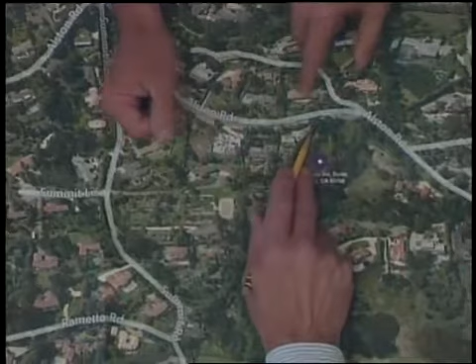We'll address story poles as we go through the process, but before you leave, I want to ask you one question. I was out there again this week. This is your home right here, and that's the current driveway? Let's see, where are we... right here. Okay, that's Alston Road, and you're coming down the road there, right here. So the best I could tell, this is a garage on that element?

Yes, on that side. So there's windows in that garage, correct? Yes. But there aren't living spaces in there? No. So all your living spaces are kind of on this side of your house? That's correct.

One thing I want to interject is that since it is a small residence, about 2,200 square feet, our plan is to add a second level there in time. And once again, if you're located in this area here, you might be able to look right into those potential windows that we plan to add in the future. We'll be looking at all that. Okay, thank you. Thank you.

Is there anyone else in the audience wishing to address this project?

Did you all get a chance to read this memo that came earlier? Essentially, the writer is saying the project is too large, the house is too large, and would prefer a one-story home, I'm paraphrasing. Okay, I'm going to pass that over to Katie, and we're going to go back to Katie.

Can you share with us what it says, plan check corrections? What was that about? Right, there were just some concerns that zoning staff had in the plan checks. One being...

The front setback. It appears the front setback may be shown incorrectly, as it may include a portion of the public right-of-way. Revise the site plan to show the complete dimensions of the public right-of-way, the paved portion of Alston Road.

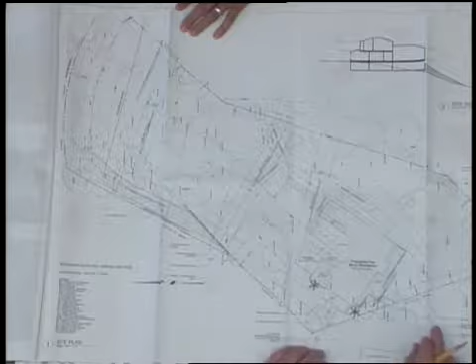Curb, et cetera, 10-foot interior setback. Another comment was the decks encroach into the 10-foot interior setback, per municipal code section 2887060B.1. Decks that are no more than 10 inches in height above existing grade may encroach into any setback. Specify the location of the proposed deck encroachment on the appropriate elevations. Provide site sections at this location and show the property line, the setback, existing grade, and the max height of the proposed deck encroachment within the setback. If it exceeds 10 inches in height, remove the portions of the deck and show compliance with the required setback.

Okay, and that's the open yard space? Yeah, I showed it in the front yard, and she wants me to show it in the backyard. And did they say anything about this staircase that's overlaying the—what is this?

Oh, this fault—yeah, this clay fault. Same thing with the garage. We're working with a geotech right now. This was confirmed, was located by Earth Systems, civil engineering out of Ventura. We're contracted with them and working with them just to reconfirm the location of this. We have verified you can put non-habitable structures—garages, stairs, and pool—in those setbacks.

So you're going to provide us with a letter or something? Yes, a report of some sort. Okay, label, provide larger scale. Okay, thank you. Well, let's go to questions then from the board.

Yes, I have one. So you had mentioned early on about the reason that it was about the trees that you moved the house down to this new location from where it originally was up in here, where there seemed to be a lot less easements—it was something about oaks and that you were not allowed to remove some of these, or...

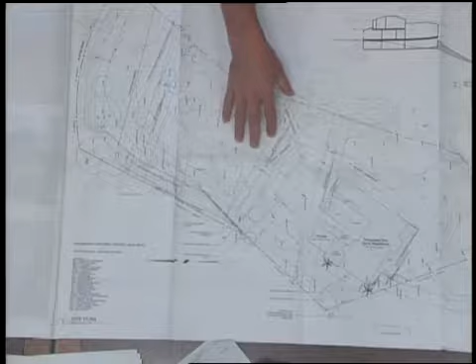So the previous applicant applied and had the Planning Commission approve the location of this two-story garage and house, but deferred back to the Single Family Design Review Board about what they would and wouldn't accept. One of the conditions of that Planning Commission approval was to minimize the removal of oak trees.

Minimize the oak trees, right, and simultaneously they wanted to minimize the driveway, which started here and had a gate and came all the way back here, and they created a motor court.

As I recall from the site visit we did back then, this is quite steep here, so you can't necessarily cut down in here. It drops really dramatically until you get to about right here. Unless you came in from up here and dropped at an angle, perhaps?

No, still can't. We have worked with the fire department, it's really steep. There's no way. So the only way to build here, you would have to enter down here and come all the way back up this direction.

Which could possibly, well, if you came up in here, I suppose you would miss the oaks. But most of these trees are not oaks in here, there's a couple, there's that and that. Yeah, those are some beautiful trees. I'm just looking to see if there's another option for you.

One of the problems we all discussed when it was here previously, when the house was — where's that footprint? Right here. It was easily visible to that house up here, and that was part of our struggle, because of the size, scale, and bulk of what they were presenting at the time was really giving us some concern about what was being seen.

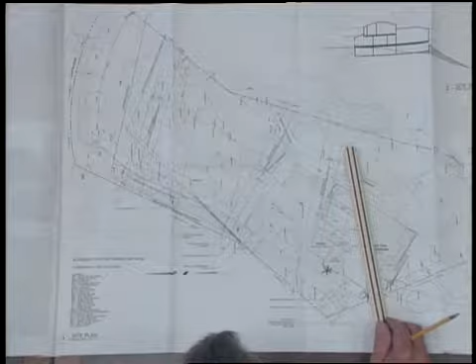Now this whole thing has moved way beyond the eucalyptus trees and way down, so now it becomes an issue for this house. Right now those two closest points appear to be about 42 feet apart, that corner to this corner.

I was just thinking, of course you want to be oriented toward the view, but with a driveway that came in and kind of came around... it seems really steep down there though, it drops, this is all dropping. Yeah, once we introduce the driveway to get here, we're just creating a lot of grading.

Gotcha, okay, thank you. Other questions? Let's see, I just want to go back and make sure I understand the plan.

So I get all of these are basically big terraces that drop off at the site — you can call them decks if one wants to, but essentially they're 4 feet, 7 feet, and then there's a staircase. And over on the side here, this is the windows in the basement off the basement level gym.

Correct, and one exterior access for code reasons. Right, so okay, I'm going to reserve that for a comment. This is the second floor office. Correct, that's only accessible from the outside, from these stairs going up.

So my question, Katie — did zoning have any comment about the fact that this isolated little office had just an exterior staircase? Michelle did have comments on that. It says the office is okay, it is attached to the main building and under 500 square feet. That's the only comment, so she didn't make comment about the stairs. Okay, thank you.

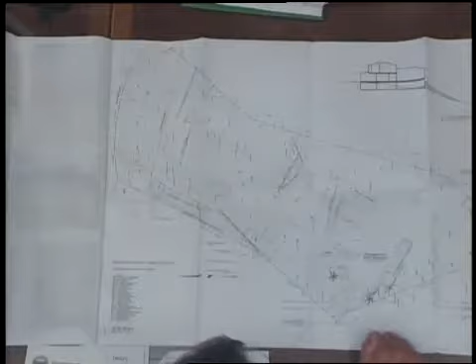But what is of concern to me is the location down in this corner. It's not so much that we're dealing with a current privacy issue, because that's why I was asking about the garage. But regardless, this site may get developed, whether by the current owner or a future owner. So one of the things we have to look at is the long-range character of the neighborhood, and this constitutes some of the neighborhood. So I would look very carefully.

First of all, you've got to address this 10-foot thing, the placement of that corner. One of the things, as you start to look at your square footage, is that if you're able to start squeezing some things down, it starts moving that back. I've realized, yes, I think you've moved the second floor back here, 10 feet, into something like that. So there's two parts to this. Do that exercise, get that house pushed back a little bit. That gets your FAR reduced.

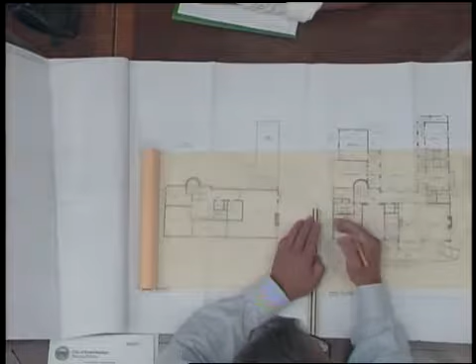And then, given what you want to do up on that second floor, what's always very helpful to me is to understand - sometimes we see floor plans and think, if you could just suck it in a couple feet on each side, boom, you've got a significant reduction. What that helps with is if you lay out whether you're actually going to use this as a bedroom - is that where you're going to put a king or queen size bed and a nightstand, and how you're really going to use that room with all these rooms. You might find that with just a little maneuvering, you can get everything you want here, just squished in.

The other thing you might want to look at - I think the location of these windows you're proposing is a good approach because they're up high. In relationship to that other property, one of the things we see quite often is that we can resolve some of these issues by really thinking about where those windows are. So one appears to be in a closet - it's not labeled, whatever that little pocket is there. You'd like maybe a window, but in Spanish architecture they sometimes just use little squares, like a foot by a foot. Is that enough light into that closet, plus it gives you head height for hanging clothes? Same with this - you might really think about how those windows get played.

The other thing that bothers me a little about the scale - first of all, the approach is perfectly fine; this is where we should have seen the first applicant, but that's another story. When you look at George Washington Smith and some of the other architects we look at for the Spanish architecture we all love - I used to live in a George Washington Smith house - you understand that on the second floor, a lot of times at the edges he dropped everything down to 7.5, 7, or 8 feet, because he had vaulted ceilings in the rooms. So you still got the value of the vault, but you got the outside scale to drop. I think you've got an opportunity, without changing this approach dramatically, by just dealing with that height there.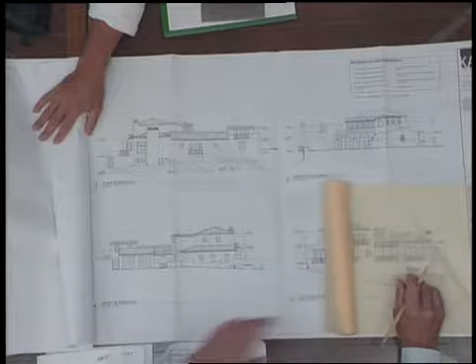And that kind of gets to Denise's point about just having this massive piece of white there, that starts to step down and breaks it up down onto the terrace. So I think more thought needs to be given to how these decks are laid out, and some thought down here. But in general, I think this is a good approach.

It moves the concerns that we had with the previous application, where that home was way up in here. We've now moved it down into this corner. I think the issue is, particularly from a landscaping standpoint, how you handle this relationship to that home. So that corner and the entry drive is probably important, so at night, when you're coming home, you're not putting car lights into his house, and he's not putting car lights into your house. That probably needs a little study.

One of the questions I had, there is a barricade fence up here now. Is that something you all put in, or was that there when you bought the property? I put it in, people are dumping trash out the side. Oh my god. You probably need to check with the city about where that is, because it might be in the right-of-way, so you need to worry about that.

So I would say you're kind of going in the right direction, but I think there's some tweaking here, and certainly if you can come back and show my colleagues on the board that you made an effort to get that FAR down, I think it's just a matter of really looking at all these spaces. But I think the general approach is good. I think there's a way to get this all to work, and a way to make it work with the adjacent neighbor so that his privacy is assured.

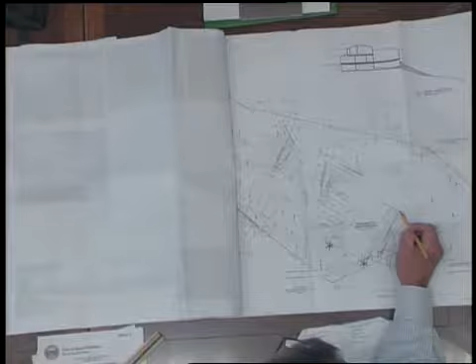And the other challenge there is if you tried to do what you'd have to, you'd have to make this whole living room drop, which means... Why not? Well, we'd have to get a variance. Okay, no, there's two things going on. If you make the living room drop, then it gets down to this owner's lifestyle.

For those of us who are getting a little more gray hair, now that I look at my 2-story house, I'm going, now as I get older, I'm going to have to climb a set of stairs, so you got to think about those things. Yeah, sure, so that's part of an issue here. The other issue is it's just this corner.

If we had other homes that looked up at that, I'd have more concern, like the other Alston Road project we looked at a few weeks ago. But we don't really have any homes that can see up into that corner. Isn't that view dead to the south? There may be people way down below. See, the house is up here, and that corner is right here, so there isn't anything in front of them.

How about from down below in the city? This is a ridge, and you can't see it from the city at all. You can't even see it from the golf course.

To articulate that point, I tried to be sensitive to the topography, and given the client's age and wanting to live here long-term, we have an existing driveway that sets an existing elevation. Once you get the vertical curve to transition from the driveway into the garage, it sets our finished floor to allow single-story living. So working backwards from the existing driveway, you end up with single-story living.

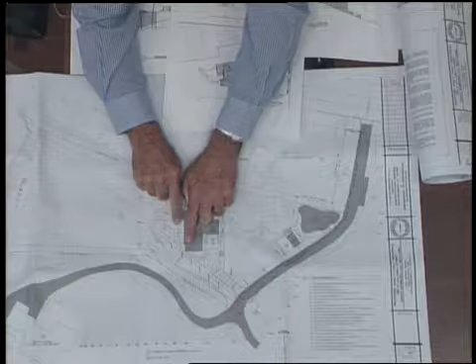Two-story elements, first and second floor above that garage elevation, are then toward the rear of the property. The only raised outside deck area, other than rooftop accessible deck areas, is a raised deck that spans from the building here to grade, primarily to get light and air to the understory down below. I can show you in sections how that works.

The average slope on the overall lot is about 28.5%. And even with that slope, we've been able to keep our overall downhill run of the total project at less than 60 feet.

This side section shows natural grade and how our building sits relative to that grade. We have a longitudinal section through the project at the point where we have our two-story tower and one-story massing at the side, and you can see our basement area or understory area is completely below the existing natural grade. These are solar envelope studies to show that we're really in good shape relative to shading adjacent neighbor property.

These are shots of our 3D model of the project that I'll just walk you through. The red bands are 5-foot differential contours. The green bands are 1 foot apart.

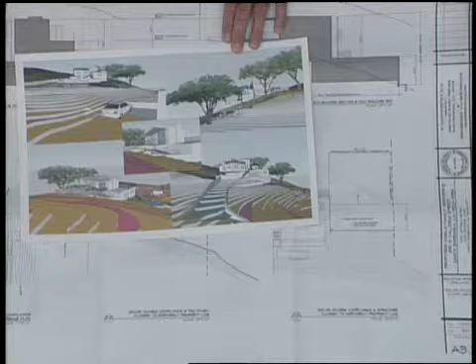And this is a view from the uphill side at the property line looking down on the property. You see the one-story garage, detached garage, and guest parking down below. And you can see our raised deck on the southern side, not really visible to any neighbors except the uphill neighbor, which is much further up the hill.

And this is a view to show sort of why we have done that, really to get light and air to that understory space down below.

I'll walk you quickly through the floor plans and then turn it over to Meg, who can talk about our stormwater management and landscape plans.

This is the lower level of the house at the ground level, coming up the drive, coming into the two-car garage, a little back-out turnaround area to get forward facing down the hill. We have terraced on the garage side, several levels of terracing.

All of our retaining walls on site, except for this portion of the wall here, this portion is 6 feet tall, everything else is 3 feet or less. We've accomplished that by doing step terraced walls to try to reduce the overall mass of retaining walls.

From the garage, you come into the central circulation area. This is our 3-story element. From the driveway access, you come up onto this entry terrace, which is above the workshop.

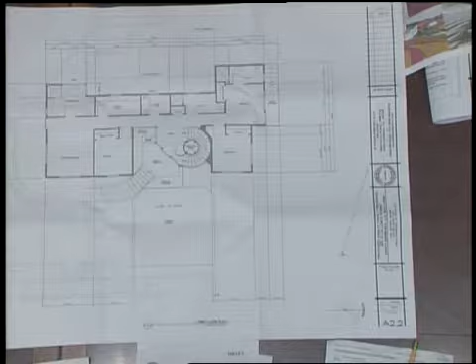This is where we have our raised windows below that exterior deck that cantilevers or extends over to touch grade about this point, to get light and air to those spaces down below. We have a small raised terrace about 2.5 to 3 feet off the ground at this point, touching ground at this point, really to get from that bedroom access out onto the site.

At the second and upper story, the vertical access point, these are roof areas over the existing structure down below, and those roof areas are accessible, as is this raised deck portion to the south of the property. Those are the access points out to the terraces.

I think probably the elevations are useful in seeing the garage, the way it steps down the hill. The elevations down below are for a one-story detached garage structure and terrace, a little bit of retainage of earth to get the 2 parking spaces and adequate space for a fire truck to turn around.

This is a section through the site, looking the other direction at the face of the garage and up into the entry terrace. This is the elevation cutting through that upper deck area on the south side, and this is the mass of the building as you're looking at it in elevation.

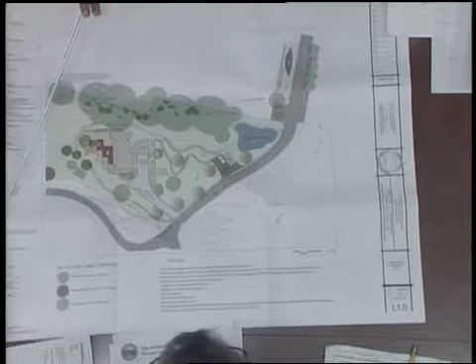These improvements along the side of the shared driveway are part of the required improvements. We're proposing a small infiltration basin here and some plantings called out in the plant list, mostly a mix of succulents and natives.

As the water moves up, it goes through our infiltration basin. We're going counterflow here from the bottom to the top, giving the water a chance to slow down and soak into the soil as much as possible.

Moving up the swale, we come to a confluence where one side of the water flow comes from the top of the property. The top of the swale is about here, and one side comes all the way down this embankment and curves under the driveway to this confluence near the infiltration basin.

Effectively what that does is capture as much water as possible that's currently flowing off the uphill neighbor and brings it down through this swale into our infiltration basin.

On the other side, we're doing the same thing below the site. So what we've done is wrapped this development envelope in a swale that can move water away from the building above it, and move water away from spilling out into the neighbors below as much as possible.

So we believe this is the most environmentally friendly and effective stormwater strategy for the site.

All of these swales will be planted with an erosion control grass called vetiver, which has been used at City College and some other sites in Montecito. I don't know if the board is familiar with that particular grass.

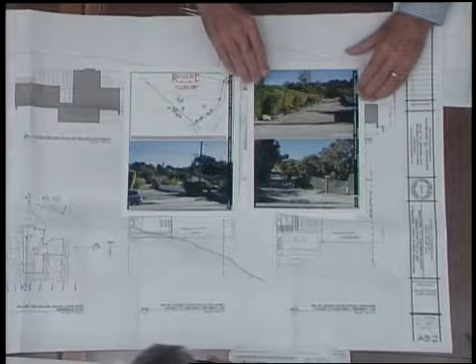This is the view of the entry of the private drive up into the site. Moving up the private drive, this is the area on one side. We're talking about developing our site improvements and stormwater management for the new private drive on this side. This is the edge of the property with the green fencing, and as you're coming up the private drive, you're then moving up the hill.

This is a view up onto the site in the building area, which is in this area. This is a view looking back, and this is a view looking across to where the guest parking pad is.

There's a natural, more flat part of the site where we'll create the guest parking and garage area. This is a view of the site overall from the guest parking area, showing where the guest parking and detached garage would be.

This is looking as you come up the private drive and look up the parcel to where our project development site is. This is about where our private driveway would come off the private drive onto the site, and this shows you where that gas line easement is.

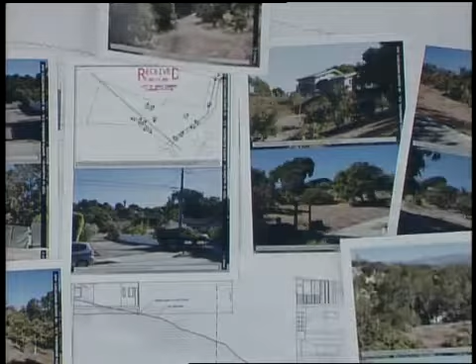This is a view back into the more woodland part of the site that we're not actually touching, and a view as if you're standing at our building site looking down the driveway to the private drive.

And this is some views of the neighbor's property, the neighbor that's visible uphill and sort of to the southeast.

And this is the view looking down our site through the oak area, down to the parcels that are down below on the properties right off of Valerio.

On the site there are some existing structures. There was an old shed there at one time; the foundation is remaining, and there was an uphill concrete element that raised the grade for a planting area. We're removing all those existing structures.

And this is just a view across Valerio Street to the neighborhood.

Okay, thank you. Before we go to questions and comments from the board, we did get one communication I assume everyone saw: an email from Pamela Halderman saying she supports the project. Katie, did we get any other communication?

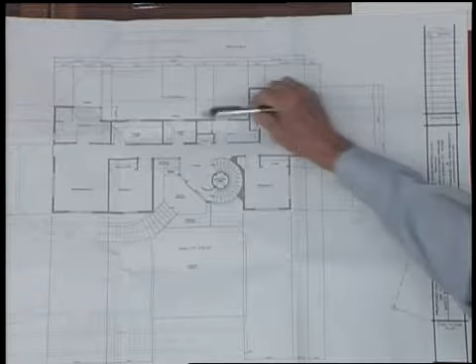The building is actually underneath the building area there. The deck starts here and comes out to touch grade, open underneath. You can see it here - that's what I wanted to point out. You're looking from this side under that deck. This is the raised deck portion, and those are the windows in that wall down below.

Okay, other questions? Anyone else have questions? I just have a couple, just to make sure I understand. There was a site plan. That's at the end.

What's this up here? That's to be removed, that concrete element I was talking about. That's the green painted concrete, looks like a bunker sitting on a cinder block that the previous owner created, a garden that was animal proof. That corner is sitting on this easement - are you going to have a problem with the footings?

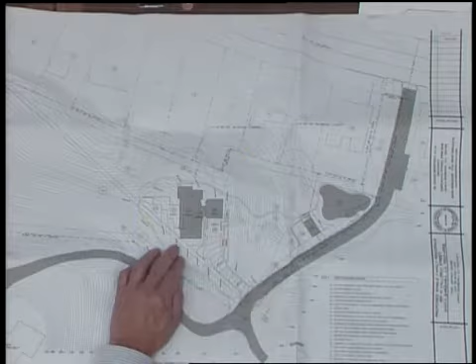Well, we've pushed it back. We've got to peel in or toe into the building because we can build right up to that easement line. The gas line is in the center of the easement.

What are you thinking about the roof material, because you have flat roofs? Yes, we have flat roofs everywhere, and for those roof areas that are accessible, after our waterproofing material, we're thinking about having probably some stone or tile material on those roofs. So you're not looking at a single membrane roofing, you're looking at a traditional built-up. That's correct.

I just wanted to get clear - you had said, I'm trying to look at the drawing you have showing the decks, is that on the first floor plan? You said the square footage is incorrect. See, there's roof here, but there's no deck there. Our deck is here, and here, and our deck is here. Okay, so that's constituting the square footage in the description?

Not totally. The other square footage is at the entry terrace, this deck here, inside this. And the others are just terraces as they cascade up the hill. That's correct.

Okay, that's all the questions I have. Any other questions? We can take any action we deem necessary, so that means we could give it project design approval, we could give it just comments, or we could give it project design approval with comments. I guess we have to make comments.

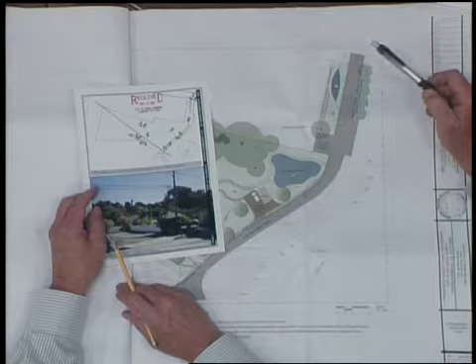So this will spill when we get rain, this will spill into this one, and this one will spill into the street, but it's filtered before it spills. That's the key, and that's huge.

Yes, go ahead. First of all, I'd like to say that I really appreciate the applicant's efforts to design a house more fitting with the site than the previous one. I also really appreciate the landscape plan, the green design features, the restoration idea, and the use of the topography.

But I definitely will not be supporting this project, because changes in various neighborhoods throughout the city have raised quality of life concerns. I'm reading this right out of our guidelines: neighborhood character gradually changes over time. When a change is made in an established neighborhood, it is essential to properly balance that change with respect for the design features and characteristics of surrounding properties. You all know this, so I won't read more, but it absolutely does not meet our neighborhood compatibility standards. It's a beautiful house, I love the house, but I don't think it fits the neighborhood.

Thank you. Okay, other comments? Okay, I got a comment.

If you go up Valerio and shoot off all the roads on the sides, a lot of those houses were built back in the 30s, and they're all different. I know the Spanish neighborhood. Every road you turn up there, there's a different house. There's modern too. You can't call West Valerio any one style. It's a neighborhood, the whole neighborhood, and they're all different.